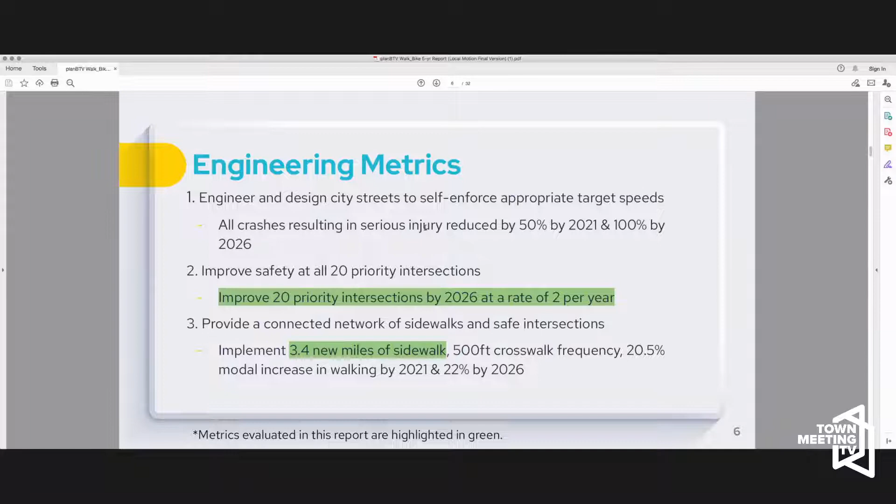So: improving 20 priority intersections by 2026, implementing 3.4 miles of new sidewalk, 28 miles of new bikeways, and 65% of those bikeways being low stress. Installing 100 bike parking spaces in the public right-of-way, a high-capacity bike parking station, and a bike share program.

So jumping right in, on intersection safety: there were 20 intersections identified, and those represented about 80% of the crashes that occurred at intersections in the city between 2011 and 2015.

Of those top 20 priority intersections identified for safety improvements in the plan, improvements have been completed at 5 of those intersections. We've got partial improvements at 9, ongoing study at 5, and then there's one intersection, Shelburne Road and Home Ave, where there's been no study, no progress towards improvements.

This is a map showing where those priority intersections are in the city and what the status is of those improvements. One thing that jumps out: the Winooski Ave corridor got a lot of improvements, but we didn't quite go all the way at some of those intersections. This represents the fact that we did a road diet on that corridor, but there are further improvements to be made.

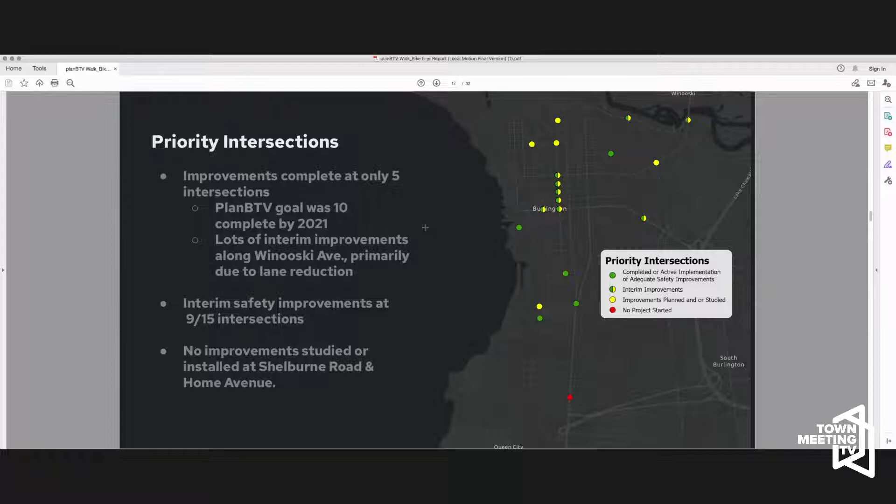There are not intersections in other parts of the city that were priority intersections, but there are intersection improvements planned in other parts of the city, and we'll get to that in a little bit.

So on bikeways, what we see is about 43% of projects aimed to be completed within 5 years have been completed. 20% are ongoing, and 37% have seen no progress. These statistics do not include sharrows or shared lane markings. It's also worth mentioning that 4 projects were completed ahead of time, not originally within the 5-year time frame, but completed within it.

Pulling out a couple of key stats: 17.2 miles of new bikeways out of the goal of 28 by 2026 have been implemented. So if you look at that 17.2 number, we're pretty well on track. But we should mention that 8.6 of those 17.2 miles are shared lane markings. So again, we've tackled a lot of the low-hanging fruit in the plan, a lot of the painted infrastructure, and what's left is some of the bigger lifts, as DPW staff is aware.

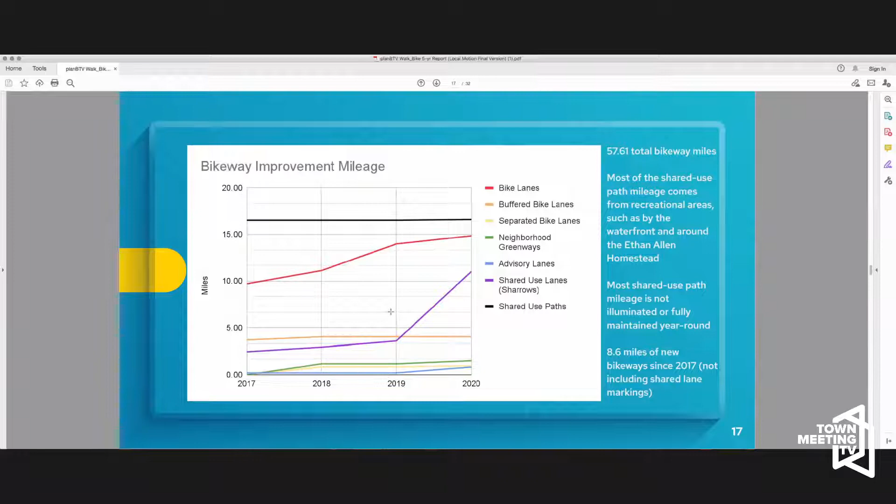This chart shows our bikeway improvement mileage visually, and you can see the uptick in the purple line, which represents shared lane markings or sharrows, and also the uptick in painted regular bike lanes. There is a slight increase in shared use path, representing the Colchester Ave shared use path, although it doesn't look like there's an increase, there actually is. But what you really see is that painted infrastructure is what we've been installing over the past 5 years for the most part.

This is a look at the network. On the far left, you've got the 2017 bicycle network, how it looked when the plan was adopted. In the middle is what the plan proposed to have completed at this point. And farthest to the right, the actual 5-year bike network as it looks right now.

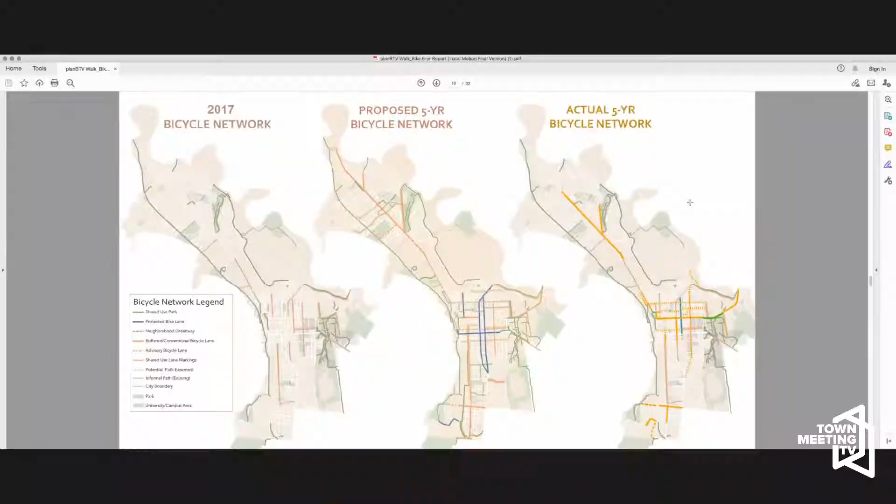What jumps out to me with this graphic is really the lack of protected infrastructure in the downtown. It's worth mentioning the one street where there is protected infrastructure, Union, has been pretty inconsistently installed. I'd say that doesn't count as protected infrastructure for most of the time since it was originally installed.

Bicycle parking spots - I think there have been some installed, but it's not something the city is tracking. I know there's interest in doing some evaluation of bike parking within DPW, so that's something we're discussing. But we did install a high capacity bike parking station, or UVM did, so this checks the box on that metric, although we would really like to see a similar indoor facility installed closer to downtown somewhere.

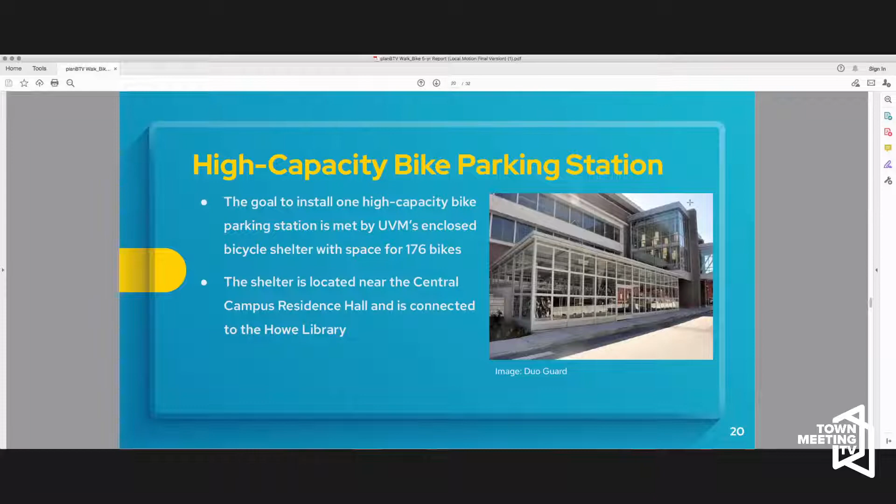Green Ride Bike Share, as we all know, is currently on hold, unfortunately. But it was great to see a bike share implemented, at least for a little while. When it's re-implemented, one of the important things is to achieve a closer spacing of the stations to meet that 1,000-foot goal between stations, which allows folks better predictability in knowing they'll be able to drop their bike off easily and find a bike easily.

There's not been much new sidewalk construction. This is a 2026 goal, not a 2022 goal, so we're not at the halfway mark. But the city is reconstructing a great deal of sidewalk every year, which has been really great to see.

Just some overall project progress: 118 projects were proposed in 5 years. This is bikeways, walk projects, and intersections combined. We've got about 45% of those complete, 25% ongoing, and 30% inactive. Again, some were completed ahead of time.

One thing that jumps out at me on this slide, and in subsequent slides, is that the new North End sticks out as an area of the city where there hasn't been much project completion. You also see some lag in the hill section, and some gaps in the old North End and the South End. But on the positive, you do start to see some better connectivity forming in terms of the bikeway network.

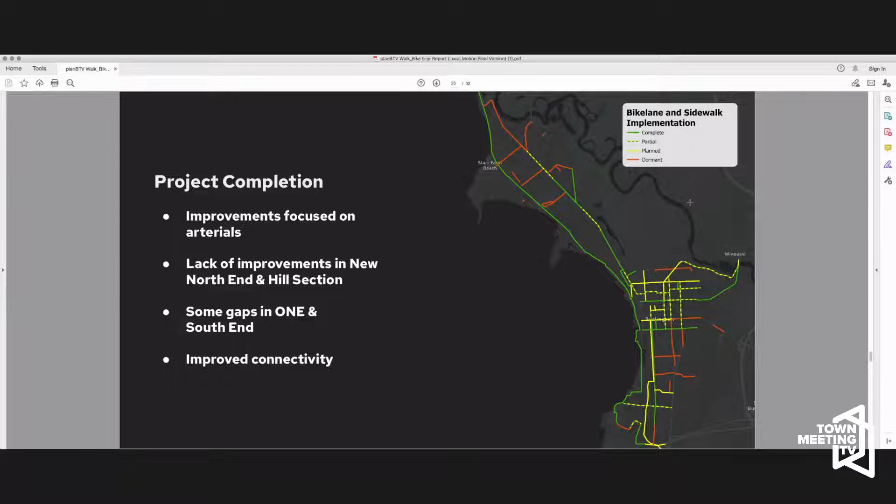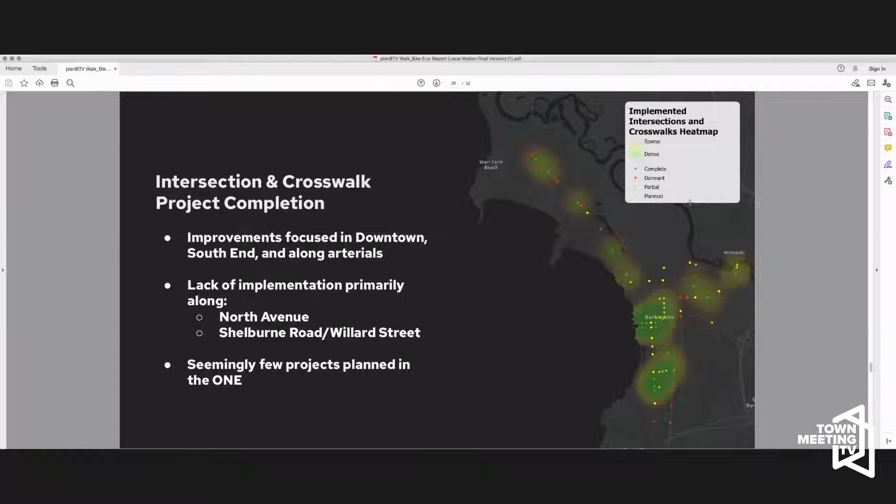This is looking at intersection and crosswalk project completion specifically. What jumps out at me is there are really two corridors where we're lagging behind - those are primarily North Avenue, where you see a lot of dormant projects, and then Shelburne Road and Willard Street. We did consider the roundabout on Shelburne Road as complete for this, it's under construction. Also notable, there weren't a ton of projects planned in the old North End, but it would be great to see the ones that were planned come to fruition, and I know there's some progress there.

So overall progress, again about half the projects in the 5-year plan have been completed or partially completed, about 45%. About a quarter of the projects are still in progress or in planning, 30% have not been started yet, and some have been completed ahead of schedule. Again, those low-hanging fruit bikeway projects - what we've been seeing put down is sharrows, painted bike lanes - not as much progress on the low stress bike network. A lot of projects have been partially completed compared to their original descriptions. Not a lot of sidewalk progress, and the bike share program needs to be restarted.

I mentioned there were some gaps in evaluation. These are mixed in with the plan's metrics, were some outcomes. One outcome was that stormwater runoff would be reduced by 80%, but it doesn't sound like that's being monitored - I'm not sure how we would do that exactly. On mode share, there are some ways to calculate it, but it's complicated by COVID, since our most accurate representation of mode share comes from American Community Survey data, which is only for commuting, so that's going to be skewed over the past couple of years. And then safety - there is of course crash data, but it hasn't really been evaluated to our knowledge.

So I'm going to stop sharing. That's the report, and happy to take questions.

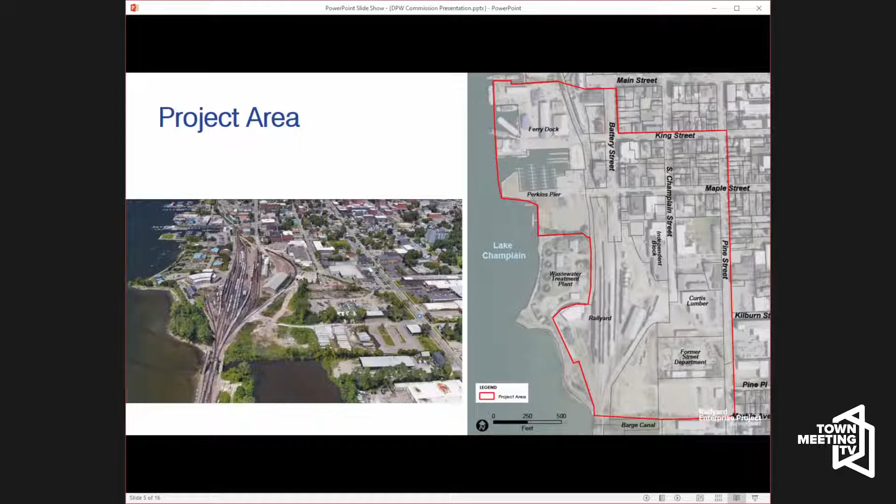So, through the scoping study, the purpose and need: we're looking to support economic development in the area, improved livability for the surrounding communities, and to enhance the multimodal facet of transportation in that corridor. As we know, biking up Pine Street isn't ideal with busy traffic, and a potential alternative option may be preferred, as we'll discuss further.

Also, we're looking to improve intermodal connections, which would help facilitate traffic flows. Through traffic studies, we'd look at how this could improve transportation through the intersections of Pine Street at Maple, King, and Main Street, and how this might help facilitate better flow.

On the project timeline, this discussion started with an initial report back in 2012, and the scoping study was released in 2016, with a lot of investigation and research done at that point. In 2017 the supplemental scoping began its process of further data collection, and in 2020 the supplemental scoping study was released. Now, at the end of 2021, we've brought on Stantec and are continuing this project, developing the alternatives further toward the preferred alternative.

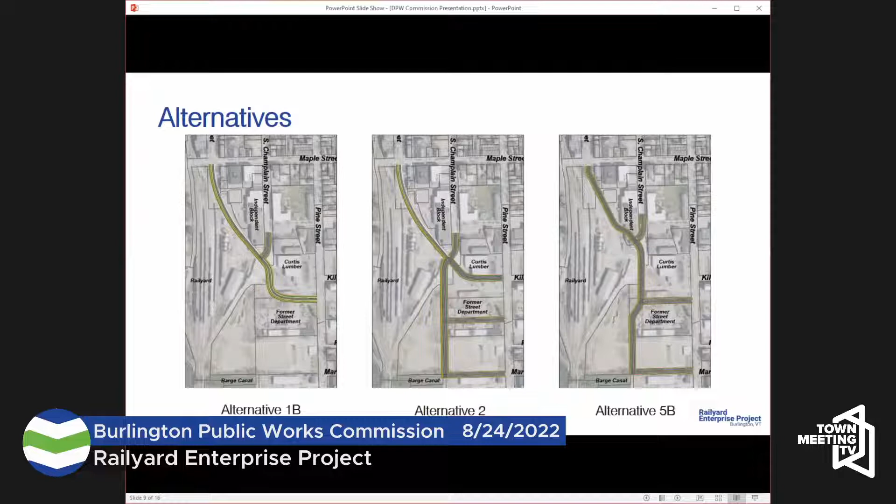These are just the general connection layouts, and the specific design details are determined as you proceed into the next phase of the design process. First is making the selection of the alternative, then you start nailing down those individual details of exact right-of-way limits, locations of facilities, and items such as that.

So as we can see, there are 3 alternatives here—we didn't show a no-build situation, but no-build is the fourth option being considered in this process. Alternative 1B is the more simple design: a connection of Battery Street to Pine Street with a connection at South Champlain that extends south and connects between the Curtis Lumber and the former street department parcel.

At this juncture, this is what is anticipated to be the preferred alternative due to a number of reasons, which we'll get to here in a minute.

Alternative 2 is a little more robust in its design. It creates more of a grid street network with multiple connections to Pine Street. This one, again, goes between Battery, connects to South Champlain, and connects to Pine Street. It also includes significantly more impacts to those parcels, as it would effectively go through the Curtis Lumber building, very close proximity to the former street department building, and a new connection closer to the barge canal.

The third option, Alternative 5B, is again very similar to Alternative 2. It eliminates the Curtis Lumber connection, and there are 2 connections to the south for that.

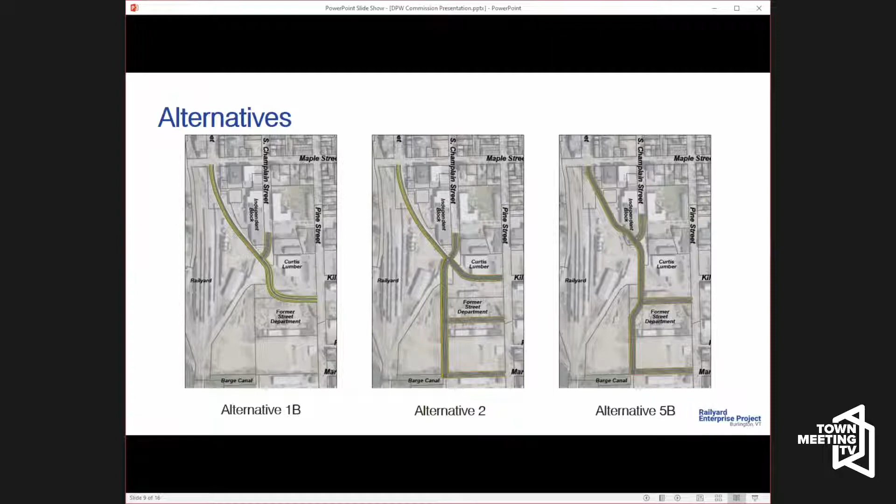So as that traffic study information has been gathered, right-of-way impacts, historic preservation - with all those considered, this is what's leading us to the 1B alternative being considered the preferred alternative.

Looking closer at the 1B alternative as it stands currently, we have been in close communication since bringing Stantec on. They've done research into the existing facilities. They have looked at property deed rights to truly shore up the right-of-way boundaries. We've looked at the historic buildings and historic structures in that area, such as the roundhouse in the Railyard, and you can see the little outline on the top portion of this page that is west of the roadway alignment.

In looking at the buildings and the impacts, we've had multiple communications with the stakeholders and property owners in this area as we've gone through this process, and we're still continuing to work with them. Ultimately, we started to get into the design details with them and how the impacts might affect them, their property, and their operations.

With all these considerations, this has been just an initial mock-up of what we're looking at as far as a 1B alternative. Again, nothing is set in stone here, but this is just to give a better understanding of what sort of improvements and what is going to be installed in this design.

What we can show here is any design we do is going to require VRS and state participation, as there is an existing track that runs through the Battery Street right-of-way that is going to have to be relocated. There's been numerous conversations, and conversations are still going with VRS regarding this, and we've had really good conversations with them - so far when we've talked about this alignment, they have been supportive of it.

Of this roadway alignment - again, this is a standard Burlington street. It's going to be a 25-mile-an-hour roadway. We're going to have signalized intersections anticipated at South Champlain. You have the existing at Battery, and there's going to be the intersection connection at Pine Street.

There's discussion, and we have on the next slide some alternatives. It's not finalized as to how that connection will be made, and that is something that will be further investigated and looked into in the next phase once a preferred alternative has been selected.

For this infrastructure, in our discussions, we have concluded that we'd look to install the shared use path on the eastern side of the roadway. This, again, is a facility that would be a shared use path. Down in this portion of it, we'd have a continuation of the shared use path that would be built on Pine Street.

They would look to, in one manner or another, cross and then continue on the north or eastern side of the new roadway alignment. So with the considerations for this project, there has been identified a bottleneck in this section as well. We do not have the ability at this phase to increase the width of the right-of-way as much as we would like in order to accommodate all desired design aspects.

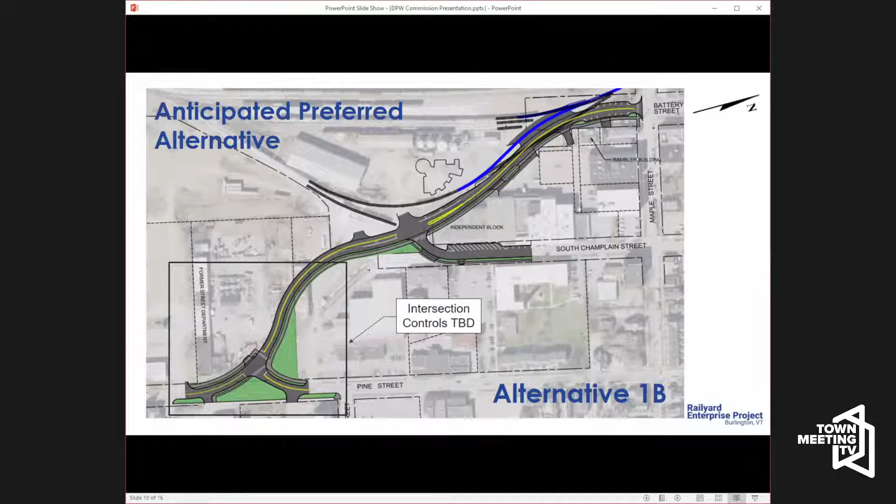We have also done in this alignment a minimal impact as possible to the property owners on the north or eastern side. In this alignment, we're looking at avoidance of buildings such as the Rambler building, back parking at 47 Maple, and maintaining the portion of the Independent Block building that has been identified as historic. We have been in close conversation with those property owners, and we continue to be in conversations.

It has been found that traffic studies have been done on these as well, reviewed to see the effectiveness and the amount of traffic that is anticipated to be diverted to the new roadway through each of these options. Some of them have a little bit different results, so I'll let Greg talk a little bit more about that. That works. Sure, yeah.

So regardless of the intersection option chosen at Pine Street, much of the traffic will be diverted to the new REP roadway that currently uses Pine Street north of the intersection here. There'll be a significant portion of that traffic diverted to the new roadway. Each intersection option comes with its pros and cons.

The roundabout is certainly a slow speed intersection. Any crash that happens in a roundabout certainly happens at a much lower speed. They tend to be deflecting type crashes, not broadside or head-on collisions that you might encounter at a traffic signal. It definitely takes up a little more space to build the roundabout around the intersection. It certainly can accommodate bicycles and pedestrians through shared use path infrastructure around the intersection. Bicyclists can choose to, the more bold bicyclists can choose to just bike right through the intersection as well. So there are options there.

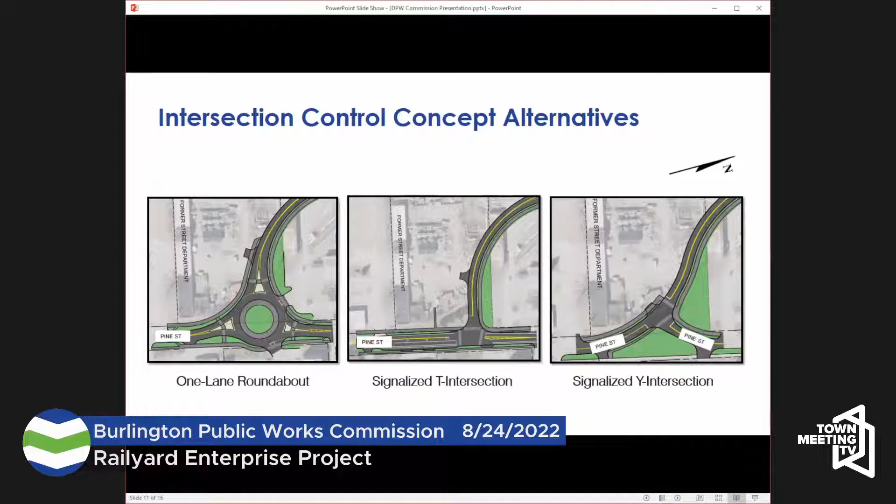The signalized Y would T Pine Street into the new roadway. It has the benefit over the signalized T in that more traffic would be diverted, but again, all three intersection options would divert a significant amount of traffic towards the new roadway. So that's probably enough of an overview for now. We can save it for questions after.

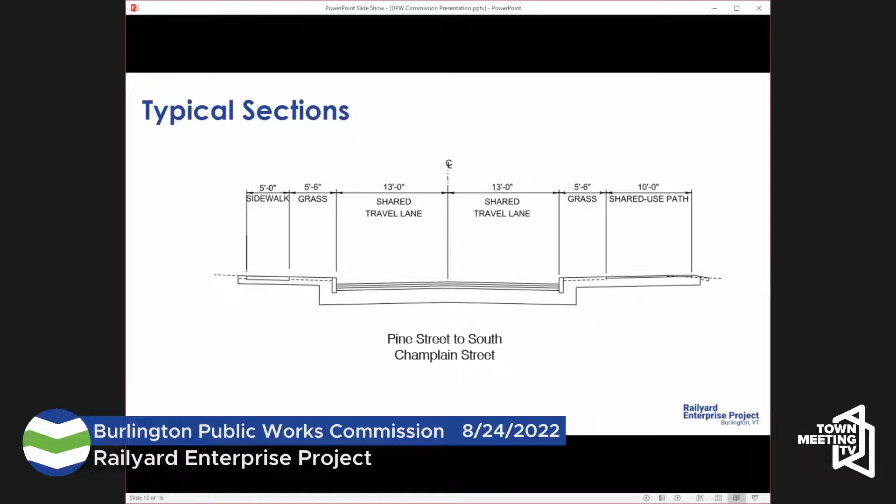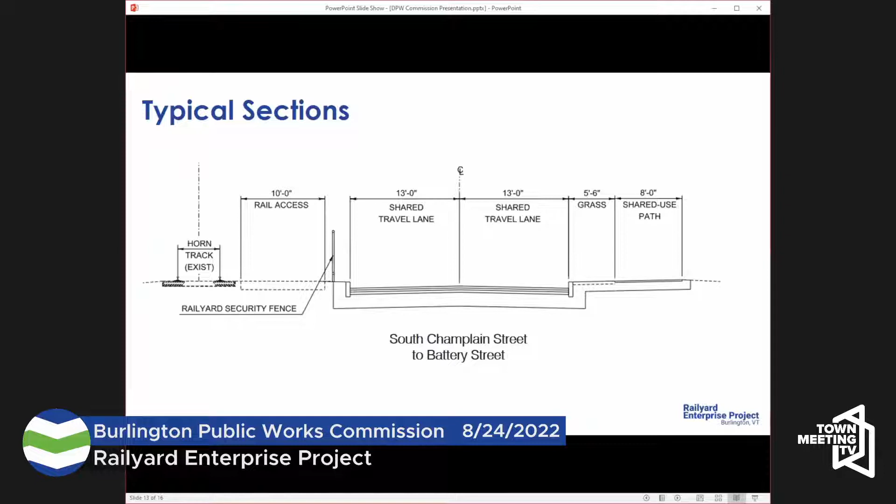So where we stand today is we're coming to you to give you an update as to where the project stands, what is looking to be likely the preferred alternative based upon the information that's been gathered so far. And we're looking to get your input, feedback on this as we look to move forward.

We do have a large public meeting coming up to discuss the alternatives and information gathered to date, to see what their input and feedback might be, similar to the presentation I am giving here today. We also presented last night to the TEUC.

Our hope is to speak to council. It'd be nice if we get there on September 19th. Then we'd look to, if we get their consensus on a selection of a preferred alternative, finalize our documentation to be able to submit to the EA formally in October. We still do have additional information that needs to be gathered and compiled to finalize that report, and that is still being worked on at this time.

Once that's done, we'd look to go on to the next phase, which would be working further on the design details. We'd be doing more utility survey work, and right-of-way acquisition discussions would truly be commencing at that point once the selected alternative has been approved. So that is kind of the next steps.